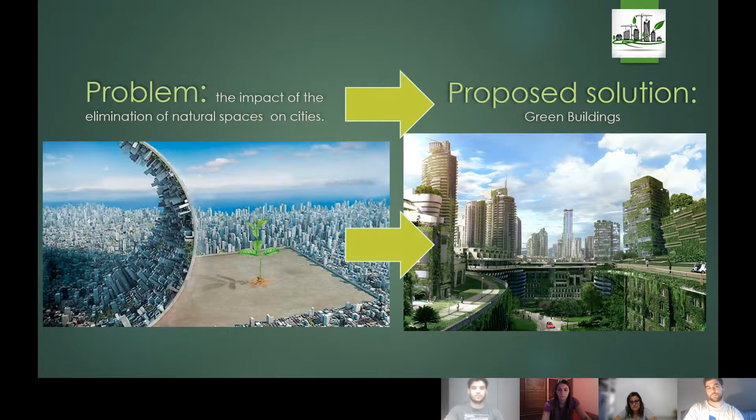To have a sustainable future, humans need to be aware of the problems, and engineers and scientists must provide a sustainable solution. In the following section, some solutions are proposed to make sustainable future housing on medium and small sites, making green buildings possible.

In the following paragraphs, firstly, green buildings are defined, followed by a description of the main problems which have a direct impact on the natural ecosystem. A clear, scientific, synthesized description of these issues, their causes and their consequences, will be introduced.

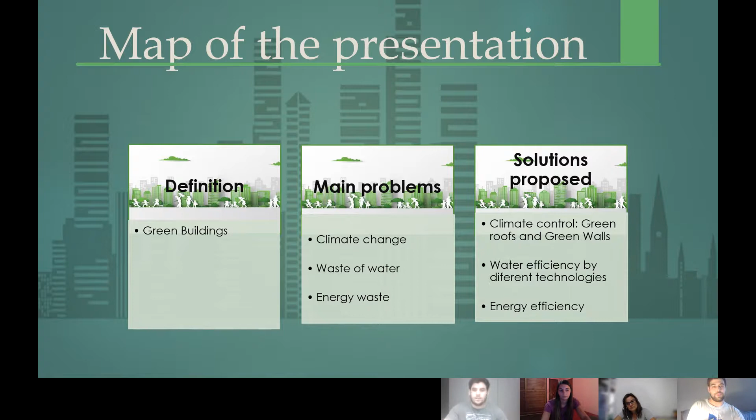Green buildings are the key to addressing this current reality so as to remedy this complicated situation. A green building is every construction that, in its design, construction process, and operation, reduces or eliminates negative impacts and creates positive impacts on our climate and natural environment. They preserve precious natural resources and improve the quality of life.

There are a number of features that can define a building as green. They are efficient use of energy, water, and other resources, use of renewable energy like solar energy, use of materials that are non-toxic, ethical, and sustainable, good indoor air quality, pollution and waste reduction measures, and the enabling of reuse and recycling of materials.

Consideration to the environment in the design, construction process, and operation. Every building can be a green building, whether it is a house, a school, an office, or a community center—every construction that presents one or some of the features I mentioned.

However, it is worth noting that not every green building needs to be the same. Different countries and regions have a variety of characteristics, such as different quality, different climate conditions, unique cultures and traditions, and different building types for wide-ranging environmental, economic, and social priorities, all of which shape their approach to green building.

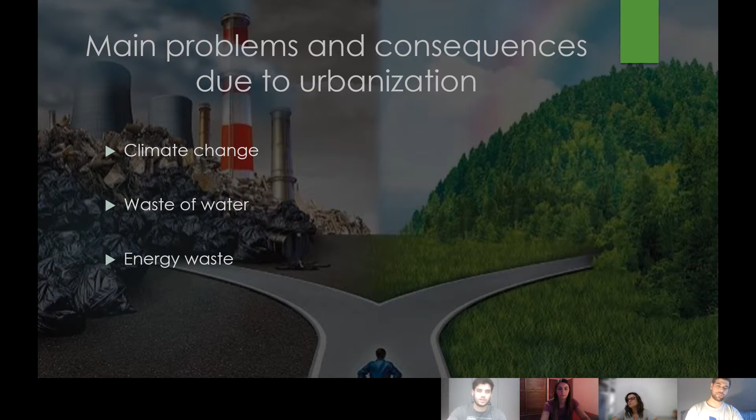In the first place, a serious problem is climate change, which is a modification in the pattern of the weather, producing the melting of the ice sheets, the ocean ice sheets. Although it has some natural causes, human influences, such as changes in the composition of the atmosphere or land use, also have a major impact. So these changes due to urbanization are mainly produced by the concrete superabundance, the elimination of green spaces, and the overexploitation of natural resources.

And the results, as said before, are extreme weather conditions in different points of the world, causing many species of animals and plants to disappear, along with the loss of potable water.

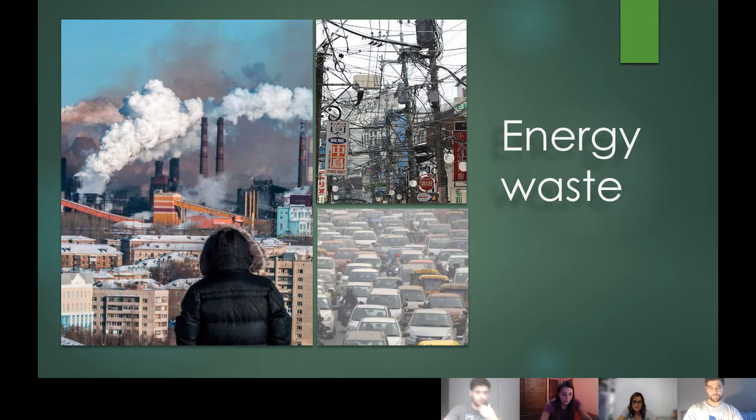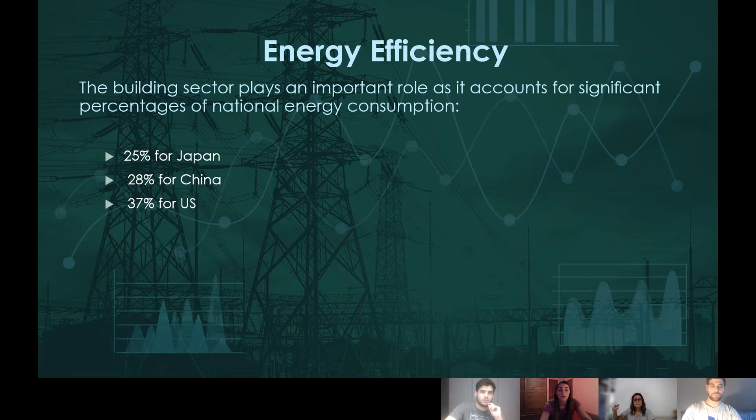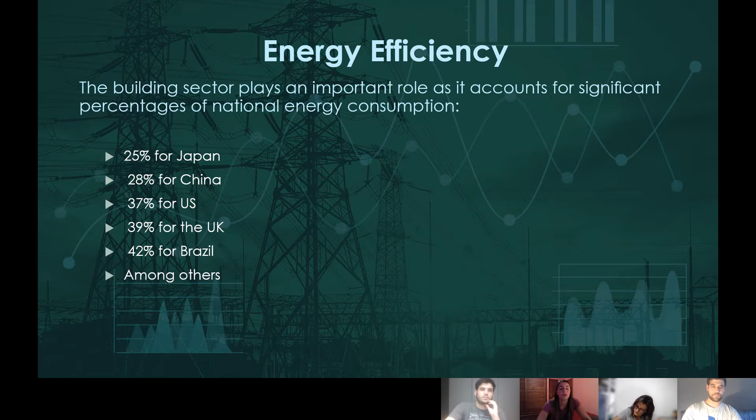Or in other words, the little use of renewable energies. Energy efficiency is a topic that is very debated in current societies. The building sector plays an important role as it accounts for significant percentages of national energy consumption, like 25% for Japan, 28% for China, 37% for USA, 39% for the UK, 42% for Brazil, among others. Buildings are big energy consumers, and reducing their energy consumption is essential to sustainable development.

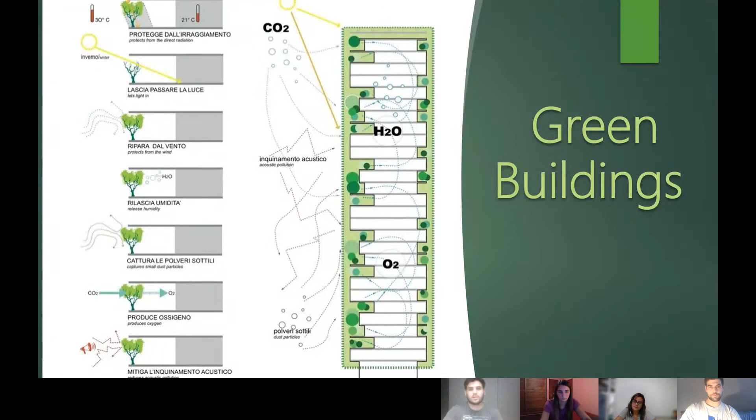So we mentioned the three main problems that generate a direct impact on natural ecosystems. The elimination of green spaces is generated by the increased number of constructions and human activities. The construction of green buildings can greatly improve the situation, or greatly reduce many negative aspects. So now we are going to present some solutions to the problems mentioned, related to green buildings.

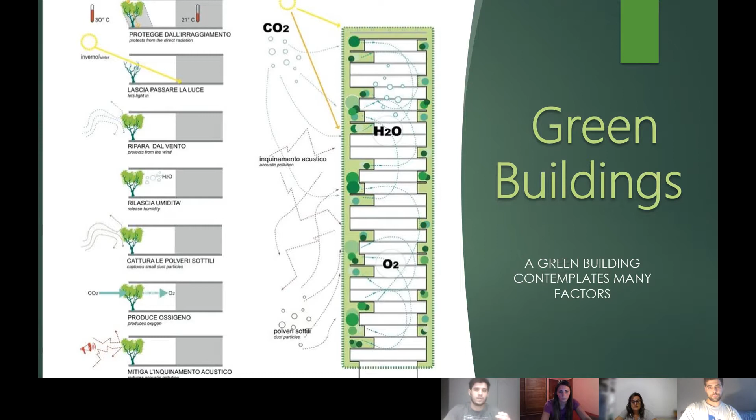Green buildings contemplate many factors, as Cinthia said, and they will be described in particular in the next sections.

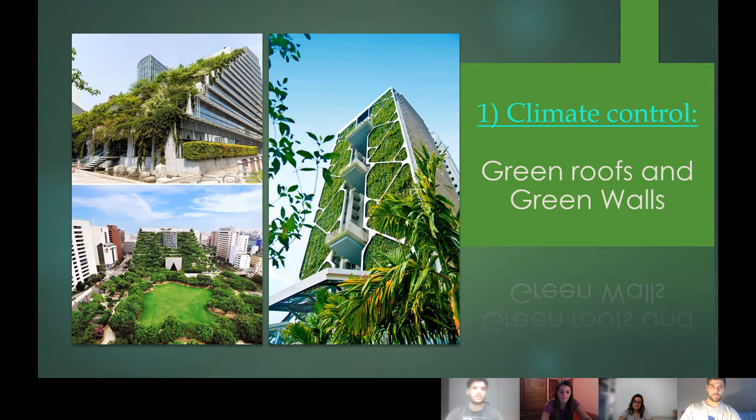In order to address the problem of climate change, green roofs and green walls are a feasible and sustainable solution. Buildings are essential to provide shelter to humans, and the best solution that could be achieved is to provide the buildings with green spaces and vegetation. Therefore, two technologies will be presented: green roofs and green walls.

A green roof is minimally composed of a high-quality waterproofing, drainage system, a root repellent system, a filter cloth, and a lightweight growing medium, and of course the plants. There are systems that have four main benefits, which can be classified into temperature reduction, energy conservation, environmental friendliness, and carbon sequestration.

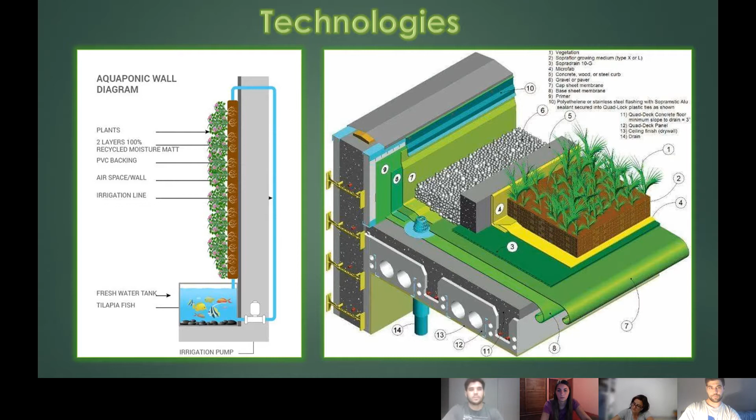In relation to the reduction of temperature and energy conservation, green roofs are capable of reducing energy consumption through high thermal insulation. They also can considerably reduce the warming of cities caused by the concrete superabundance.

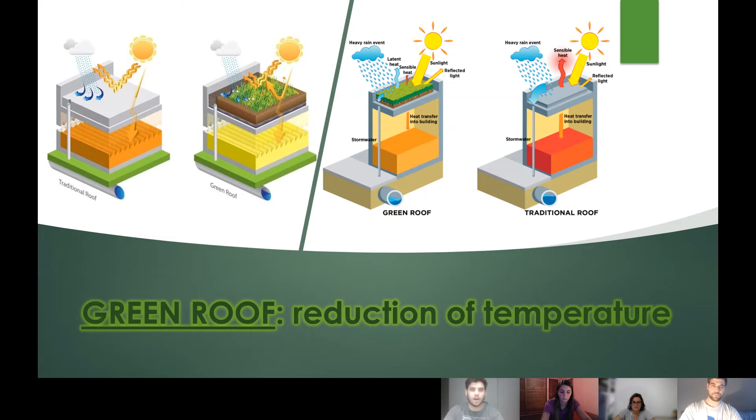Green roofs can also incorporate a variety of plants and invertebrates, and they provide a habitat for various bird species. The result is an additional benefit: the ability to sequester carbon dioxide.

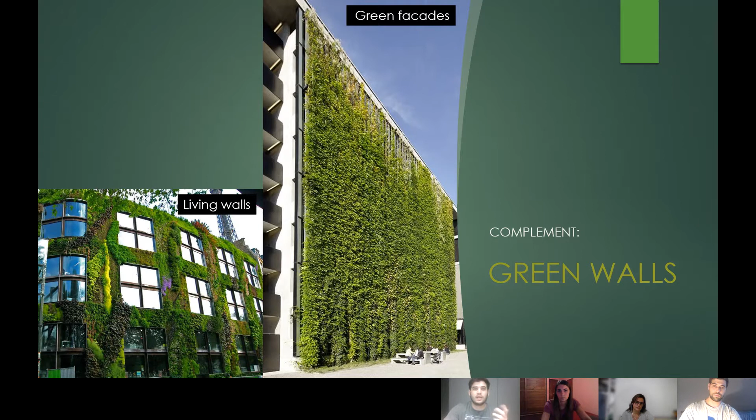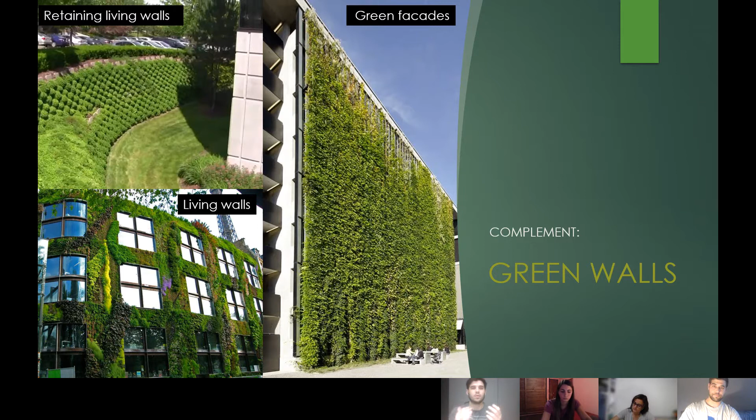In order to complement green roofs, there are the green walls that have been installed in society in the last years. They are vertical structures that have different types of plants or other greenery attached to them. There are three types of green walls that can be mentioned: the green facades that you can see on the screen, the living walls, and the retaining living walls. The benefits are the same as mentioned for green roofs, and the use of green walls allows multiplication of the green surface, so the benefits will be multiplied.

Water efficiency by means of different technologies within cities, public and private buildings and construction commonly generate excessive use or misuse of water, and great waste of it, which is increasing. For this reason, it is very important to take measures that help reduce or reuse water. This objective can be achieved by means of new water conservation and recycling technologies in homes, and even more so in public places. An average of 68% of drinking water is used for washing and flushing toilets.

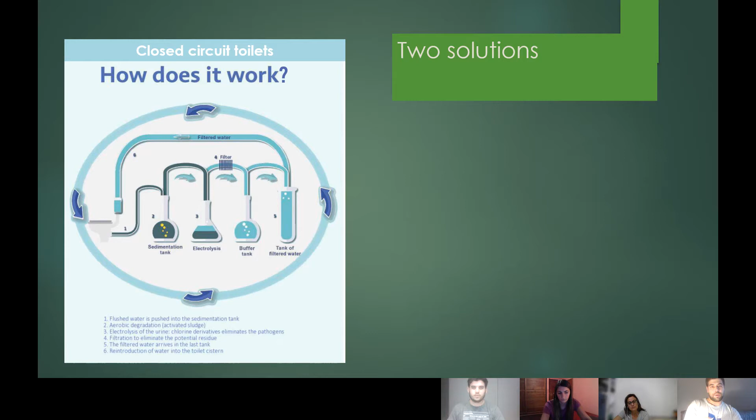They reduce and control the amount of water used per use. Another technology is rainwater collection.

The rainwater is collected by the gutters and carried through pipes to a tank or cistern. It can be directly used for irrigation or flushing toilets, or it can be taken to a treatment system that filters it and turns it into water for home use.

In many places, rainwater harvesting is used as a main water supply, in-house, or even as the only water supply, using water perfectly and efficiently.

The benefit of applying this measure not only contemplates the environment, but also a decrease in the expense produced by water bills.

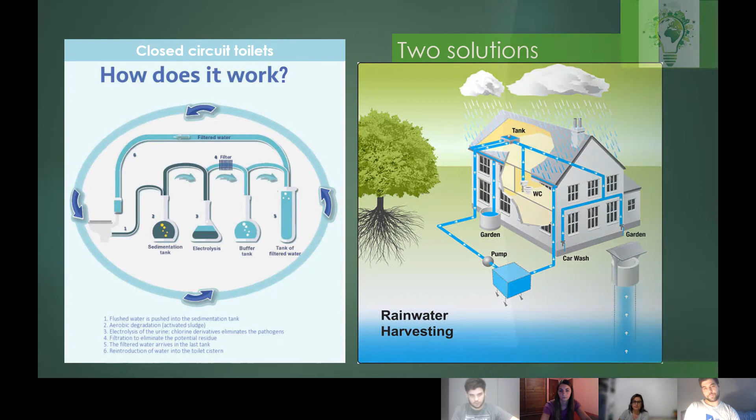Finally, the most important factor to improve in green buildings is energy efficiency. It is the most important factor because it's the highest consumption, and it is essential to people's lives and business development. So it is necessary to reduce its use and use it in the least polluting way possible.

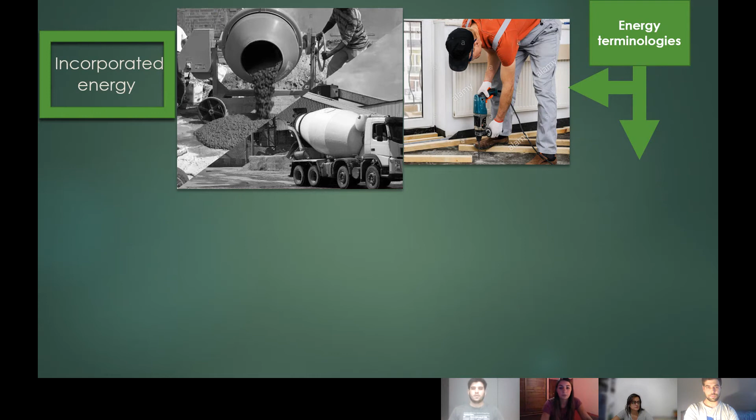In buildings, there are two energy terminologies: incorporated energy, which is the energy needed to extract, transport, and manufacture a product until its process is completed and it can be used; and operating energy, which is the energy consumed by a building during its operational life.

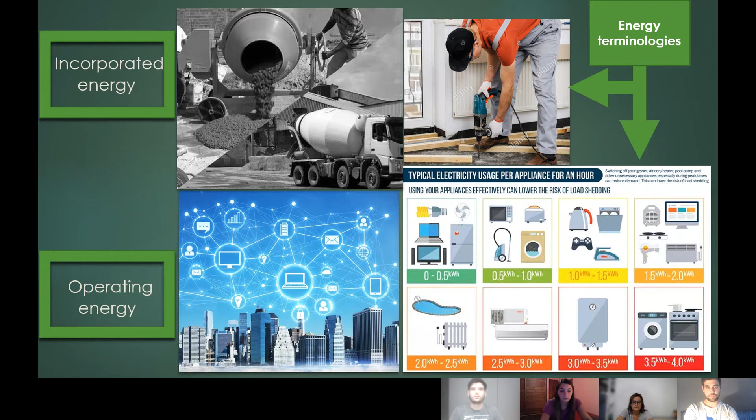Relating to operating energy, there are some aspects that can be considered from the beginning of the project, before construction, like the siting of the building, if possible to choose it, and green roofs and green walls, like my partner presented.

They generate a great reduction of temperatures and insulation due to the green layer that absorbs the heat. In general, most of the lost energy problems in buildings are related to poor roof and wall insulation, as well as glass openings.

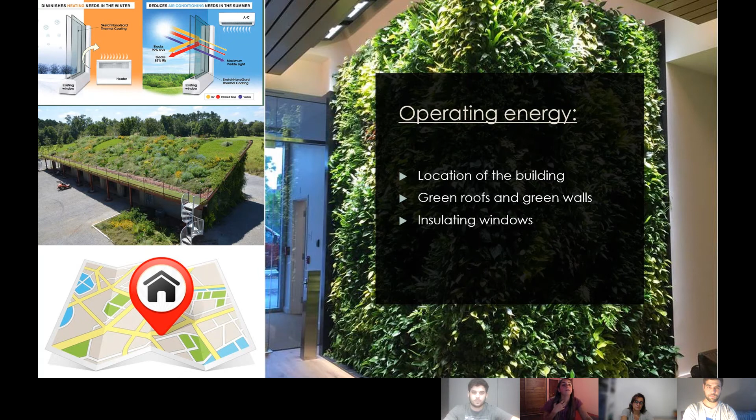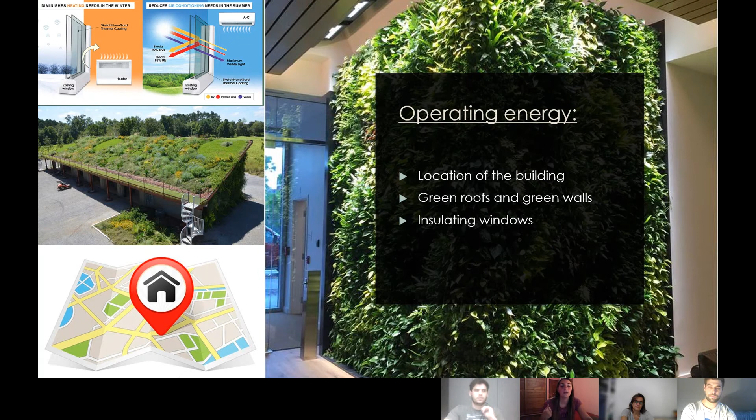To solve this last problem, there are insulating windows, which generate a barrier to the passage of heat and cold, reducing the need for heating. Their performance depends on the number of glass layers, the density, and conductivity.

Finally, another important aspect to implement in green buildings is renewable energy. This is the most important. It has become essential to provide energy in the least polluting way possible, so that the solution that benefits people is not at the same time a problem for the environment and people's health.

Actually, the most used energy is electrical energy, which comes from fossil fuels. It generates a great impact on the environment.

But there are a lot of renewable energies that can be used, like solar energy, hydropower, geothermal energy, wind energy, biomass, and biogas energies. All of them greatly reduce pollution to the atmosphere, and they are very efficient, with greater or lesser benefits.

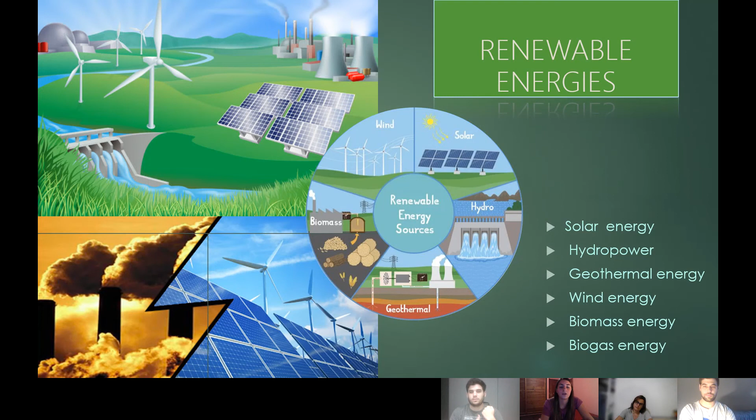Before finishing this presentation, we are going to mention two professionals, engineer Moises Altman and architect Liliana Altman. They designed, planned, and constructed the first sustainable building in Buenos Aires.

This is an office building. It has 13 floors, and this building is capable of saving up to 30% of energy using solar panels.

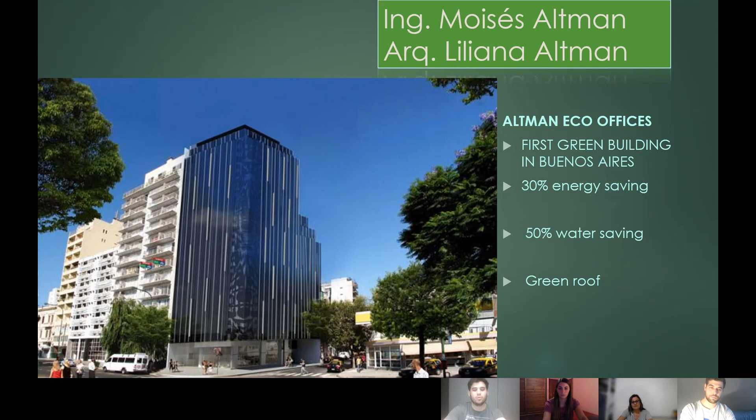It's also capable of saving up to 50% of water using the closed circuit toilet that Gonzalo mentioned, and it has a green rooftop, and it's also prepared to park electric vehicles. So it's an interesting building in our country that we wanted to mention.

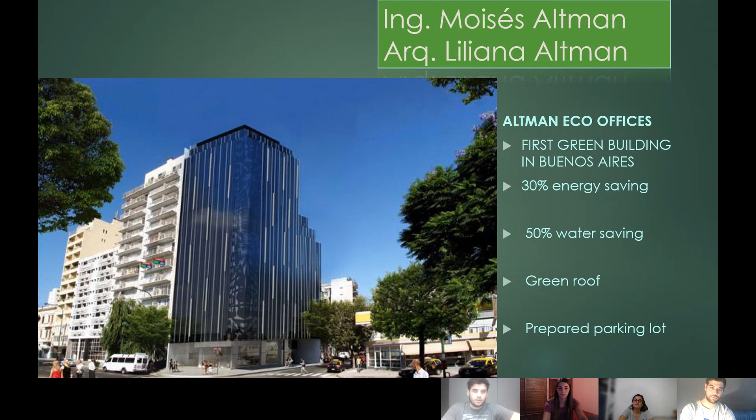To conclude this presentation, we can say that green buildings are relevant technologies in developing and refurbishing areas to meet the challenges of a sustainable future. The use of different technologies that turn a building into a sustainable one presents an opportunity for improving the present paradigm and to stop damaging nature.

At the same time, these technologies bring opportunities for long-term improvements in the environmental impact of cities and more efficient use of resources, making city development easier and more effective.